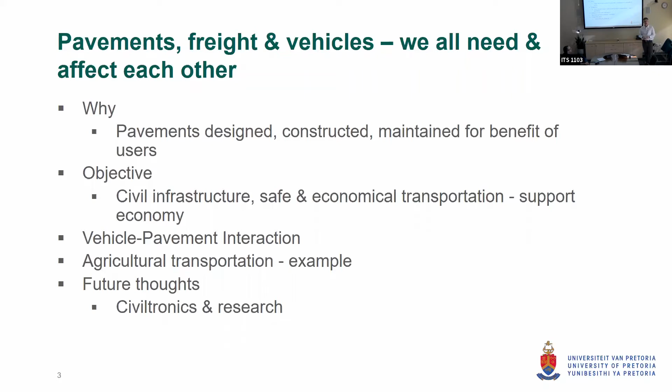And then use some of the agricultural transportation examples of work that we've done in California and South Africa as a way to explain some of these bigger issues and how your little bit of work that's very important can fit into a bigger picture and can affect the general population out there in their day-to-day lives. And then lastly, a few things that sort of tie together some of the instrumentation and some of the more future thinking about what we are doing.

Okay, so just to give you some perspective, I decided to use South Africa for this because obviously I know the picture a bit better, but as a general idea. South Africa is on the southern point of Africa. A good way of naming a country. It's on the southern part. And it's very much similar to you guys. North America, northern part of America. So it makes life much easier in terms of naming it.

We've got a road network of just about 750,000 kilometers of roads. So that makes us the 11th longest road network in the world and the 18th longest paved road network in the world. But what's quite important is that about 80% of that road network is gravel pavements. So although we've got this huge network, if you look at it over there, that's the center of the economic activities of the country. Johannesburg, Pretoria, my university is just over there. The blue roads that you see is our national road network.

Our interstate, if you want to say it like that, connecting the country together up with the northern countries in Africa. But then you've got the red lines there, which is the more provincial type of roads. You've got the smaller ones.

And in the end, it's important to appreciate again that although most of your work that you are doing, and that you will see if you start to talk to people about pavement engineering, about transportation models and so on, most of our work focuses on interstates, highways, major traffic type of roads. Because yes, obviously that's normally the more economically important ones. That's the one that if something goes wrong, you've got a bigger problem.

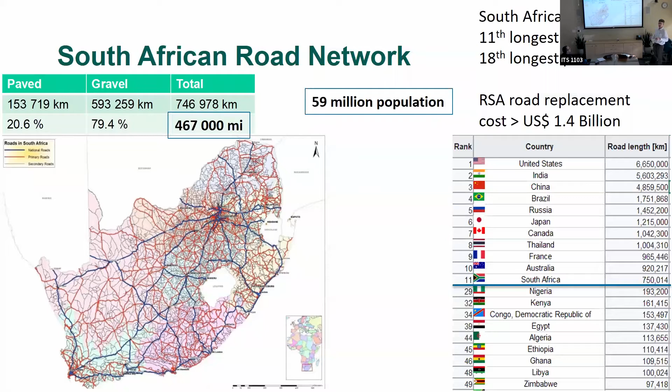If you look at our country over there, we've got some snow now and then over there, the mountains over there, and in the mountains over there. Further on, we don't have snow on the roads. So anyway, it changes depending on the environment, what you need to do on your roads. Keep that in mind.

Okay, so brings us again to the why. Why is all of this important? Why do people need to travel? They need to travel for social reasons. They go and visit people. They need to travel for economical reasons. You need to get to your job. They need to travel to either collect food or to distribute food. And that would be important for the second part of what we are talking about.

And as an example about that, if you're talking about transportation and logistics and movements, it's never a simple solution, because if you look at the pictures, that guy is transporting tomatoes, those guys are transporting tomatoes, that guy is transporting tomatoes. So all three of them transporting a vegetable from one point to another one. But depending on the need and the requirement and the market and everything, there's a total difference in terms of the transportation needs and the road needs and the pavement needs between those three aspects that you look at.

Other reasons why we need to travel: education, safety and security, health, you need to be able to get to clinics, hospitals, and so on. So a lot of reasons why people need to move stuff. And whether the stuff is other people, themselves, goods, whatever the case may be, you want to move that in a safe and economical system.

So you want to make best use of your limited budget, and you want to be able to have a bit of a guarantee that if you travel from here to San Francisco, for whatever reason, you've got a pretty good probability that you will arrive there within a certain time. That's something that you expect.

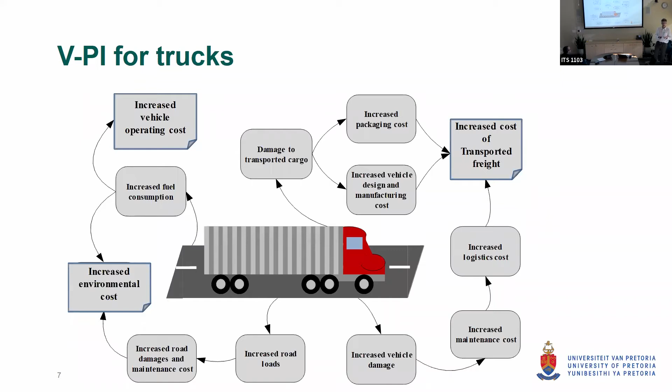Another reason why riding quality is quite important is this example of what do we know if we know the riding quality of the road. A road can deteriorate because of many problems or issues. To make it simple, you can have permanent deformation, which is rutting, or you can have cracking on that road. Whatever goes wrong with the road ultimately is visible through worsening of the riding quality.

So that's why we see measuring the riding quality similar to you going to the doctor because you don't feel well. And from experience, all of you will know if you go to the doctor and you say, listen, I don't feel well, apart from the fact that you are bleeding profusely because you cut off your hand or something obvious like that, the doctor will listen to your story and say, thank you very much, come and sit down. I want to take your blood pressure. I want to measure your temperature. And those two indicators are not really going to tell the doctor what is wrong with you.

But if the blood pressure or your temperature is outside of normal limits, it will start to tell the doctor, well, maybe you are really not feeling well, and maybe they need to look a bit further into this. If you come in and you say, listen, I really don't feel well, and your blood pressure is normal and your fever is good, they will probably ask you, so what exam are you writing tomorrow? Because everything is within spec over here. So it's an indicator of the health of the body. And in the same way, riding quality is an indicator of the health of your road.

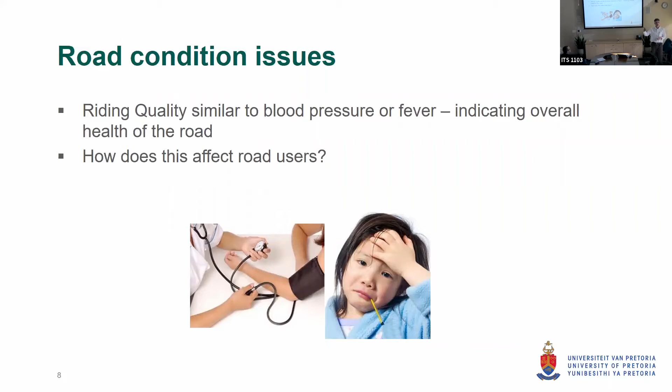Over time, again, many studies have been done on this where you can see that as you use a road more and more, the riding quality typically deteriorates. So it's a standard feature of a road. It's not a road that's badly constructed. It's a standard feature. Over time, it will deteriorate. And you will have to, with use, get to a point where you do some maintenance and some rehabilitation to that road. Okay, so in terms of what happens to all of this cost, I've got these vehicles with freight traveling on the road. I've got my riding quality that changes.

If you look at what we call the logistics costs of transporting stuff, and this is an example of our South African ones, you will see you've got transport, which is this major part here at the bottom that runs at about 50 to 60% of the total cost. Then you've got other stuff also, inventory carrying cost, warehousing cost, and things like that. But you can see that in terms of getting stuff from point A to point B, although there's a lot of other costs, your transportation cost is a major part of that.

So being a 60% part of your logistics costs means that it's important, but it also means that if I can manage this part better, I can maybe cut down on that total cost significantly, whereas if I ignore this major part of my bigger costs, it's very difficult to get away from that and to save in terms of transportation cost and drop the cost of goods that you have to deliver.

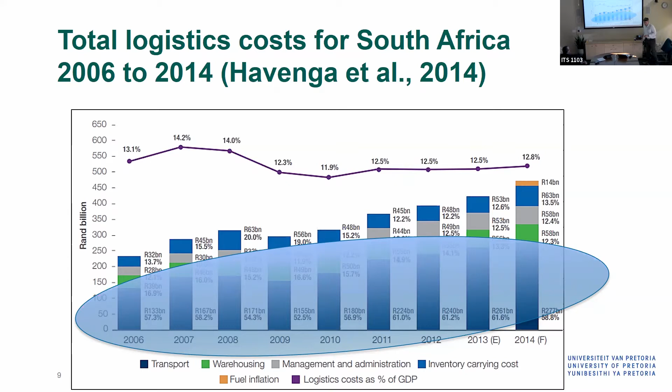So let's now get to something that's a bit more close to an example of why these things are important and how you can see them in your day-to-day life as transportation engineers, pavement engineers, and road users and people using goods that are transported on roads. So in terms of the projects that led to a lot of what we are talking about here, as I said now, riding quality is indicative of road condition, and it affects your operating cost, your transport cost, damage cost, and so on.

So in about 2010, we had a discussion during some of our meetings over here with Prof. Carl Monismith, still at that stage at Berkeley, in terms of, we know this is important, but how do we actually characterize this cost? How do we quantify it? How do we get to people that are in places where they decide on a roads maintenance budget and convince them that a road with a bad riding quality really needs attention?

Because the problem with riding quality on the one hand is that the road is not falling apart. You can still drive on the road. And you don't really see that it's bad. You may need to drive a bit slower, but it's not the end of the world. So it's very difficult to convince the people with money to spend more on a road that's in a sort of not bad condition to improve that, because that will lower my logistics costs, my operating costs, and my environmental costs.

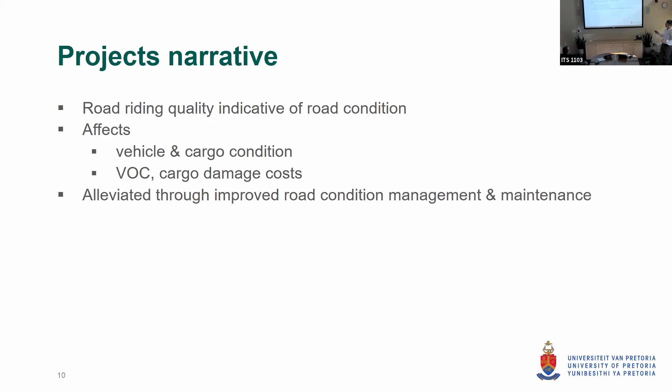So at that stage, we started what I will call the Caltrans projects in 2012, some of the measurements in terms of transporting agricultural goods. And then once we started with that, some of my local guys in South Africa heard about it, and the biggest tomato producer and avocado producer there contacted us and said, listen, can you do something for us also? And it grew, and the latest study is one that started end of last year.

And I will take you through these examples now and show you partly why vehicle pavement interaction is important, but also quite important how technology changes over time and allows you to do more and more things, get a better answer than what you have been able to do previously. That's also, I think, quite important.

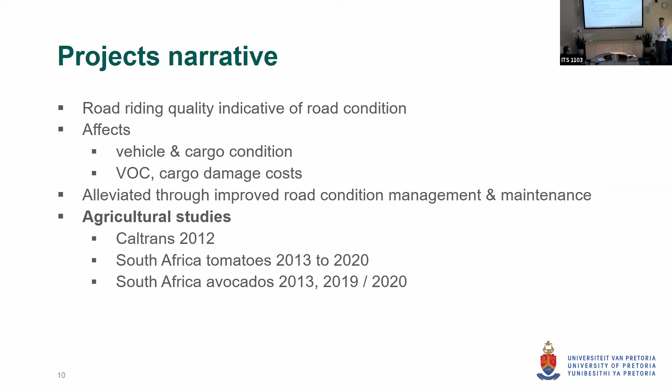You guys are studying now, you learn new techniques, you learn about sensors or stuff, and you think, wow, I get a degree, I know all of this stuff, I now know how to do my job. The bad news for you is in 5 years' time, there will be better technology, better methodologies, and most probably different questions to answer. And you will realize, oops, the stuff that I knew 5 years ago is not enough to answer questions in a good way anymore.

So, let's start. First project that we've done was in 2012. Up until that point, if you wanted to measure accelerations in a vehicle, which, for the context of vehicle pavement interaction, is basically measuring how much the vehicle bumps up and down as you drive on a road, you had to install accelerometers on the vehicle with wires, with a big data acquisition system on a computer, and then you could collect a lot of data.

Now, if you look at the truck that the farmer uses to get the tomatoes from the farm to the packers and so on, you can think for yourself, if you have to get permission to install a lot of accelerometers at certain places with wires and everything, it's very difficult.

So in our evaluations at that stage, we got hold of a little sensor, and I'll show you, it's a bit bigger later on, but you can see that there in the circles, it's about that big, it's a standalone accelerometer, and it provided us with the opportunity of instrumenting a vehicle at different points, also inside the tomatoes that's being transported, drive over a number of roads, and collect the riding quality as we drove. And also collect what happens to the cargo, the tomatoes in this case, as you drive on those different roads.

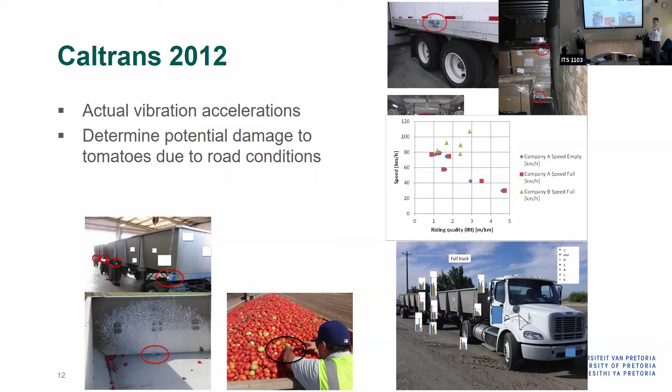So we could measure the actual riding quality of the road using different technology. We can measure how much the vehicle is reacting to these different roughnesses of road, and there you can see different roads. And we could measure what will happen, we think, with the tomatoes sitting over here in this vehicle as it bumps up and down. So taking all of that data, and this is one specific road section, we had the measurements and we said, okay, but now we can start to see how much of an effect it really has.

So in terms of the road roughness measurements, I'll just get to the colors for now. You can see that there's a green section, and then there's a red section that's worse, and the yellow section that's sort of in between in terms of riding quality. So we've got a good section, a medium section, and a bad section. Same section of road. So you drive from here to there, and due to various reasons, you've got these different qualities. Now, if you convert that through various calibrated models, you can also transpose that to the tire wear on the different sections of road.

And what's interesting over here, and I think that's also important for your understanding of different types of models, you will see that we've got three different levels of roughness on the road. But in terms of the tire wear, there's only a tire wear over there, and those two sections, although it's a medium and a bad section in roughness, they gave a similar output in terms of tire wear. So the fact that your riding quality has got more subsections does not always mean that whatever you calculate based on this will also relate in the same way. So for the tire wear model, it showed us that was not too bad, that was a bit worse.

In terms of repair and maintenance on the vehicles itself, we again got different outputs in terms of tire loads and emissions and fuel consumption. We could also show the differences. So the benefit at that first point was that you could say, okay, if you transport tomatoes, this type of vehicle, on these roads at these speeds, you can see that in terms of fuel consumption and therefore operating costs, you will get different responses on different sections of this road.

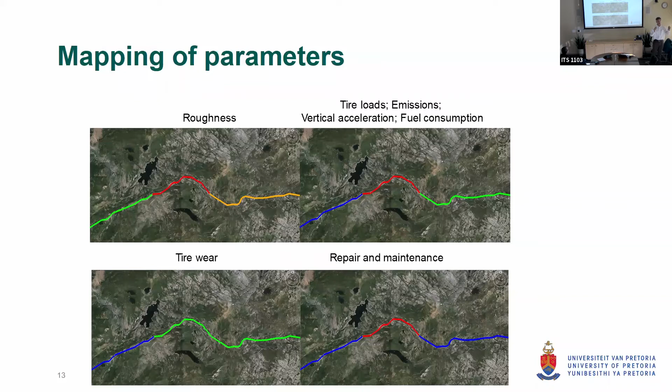Which obviously will tell you that if the cost on that middle part, because that was the worst part with the worst riding quality, becomes too high because of bad riding quality, if you fix that road, if you improve the riding quality of that section, you should drop the cost on that section of road, you should drop the tire wear, you should drop the repair and maintenance cost. So ultimately you drop the logistics cost of transporting your tomatoes. So that was part of what we got out of the first part of the test.

Now in terms of the sensors that we used for that, what you see on top is the accelerometer. It's about that big. It was really a major step forward at that stage because you could just bring them out, fix them to the vehicle, fix them into the tomatoes wherever you want them, do all your data collection, get back to your lab, download the data, and you've got a full picture of what happens over there. So that was quite a step forward.

At that same stage, sort of halfway through this project, we got hold of another type of sensor. That's those flexible plastic contact stress measurement mats. Now, the benefit of those things, you will sort of see the little black spots on it. On that surface area, and you get different sizes, you measure the contact stress between whatever you press on top of that mat. So if I've got a tomato there and a tomato over there, I can measure the contact stress between those two tomatoes.

As I said, this became available halfway through the project. So at that stage, we had data on how much our tomatoes bump up and down in the field. We could not install this in the truck at that stage. So we got to the laboratory.

We used the accelerations that we measured in the field. We made up these boxes of tomatoes with the sensors on the inside, and we applied the same accelerations in the laboratory as what happened in the field. And we said, okay, now we can measure what are the contact stresses between the tomatoes.

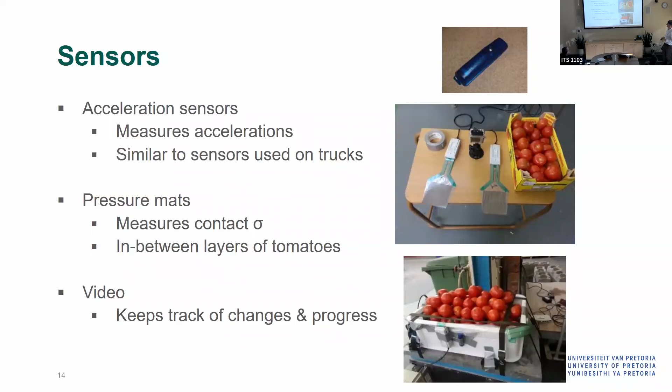Now you stand back again a bit and say, well, why do we do this? We are pavement engineers. We are interested in building a better road. We are doing this because this tells us what's the effect of our road on the tomatoes that are being transported. So we put all of that together and we got contact stresses.

Now, the next problem is, if I tell you that the contact stress on the flat side of a tomato, if it's green, is 28 kilopascals, then you say, wow, okay, that's good news. And so what? I mean, if I tell you it's 400 kilopascals or 2 kilopascals, you start to get the values, but you need a relationship of, so what? How much damage is this?

So that's where we started to engage with the agricultural people and said, okay guys, how do we now determine where's the cutoff point? What is bad and what's not bad? Unfortunately, they've got various systems looking at this. And the basic crude one that we used, which was not that bad in the end, was to say, okay, let's apply these stresses to a set of tomatoes.

And you'll see that there's green and ripe, and you'll see later on pink and red. We learned a lot about tomatoes in the whole process. And we did damage a lot of tomatoes in the process. We also ate a lot of tomatoes.

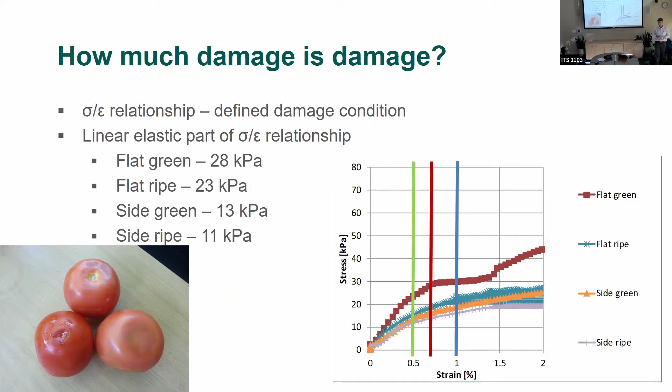But basically we said, okay, let's apply 28 kilopascals to a tomato and put it on the shelf and see what happens to this tomato. And we also do it with 13 kilopascals and so on. And essentially we want to see, when does it start to look bad? That was for us not too bad from an engineering viewpoint. And you'll see in a few slides why that was actually not a bad idea to do that.

So what we got from this up until this point was to say, we can use the relationships that we've got now, which tell us on that type of road, this is how much tomatoes you're going to bump up and down. And these are the stresses that they are going to feel. That helped us from a road user viewpoint to say, if I've got alternative routes available to travel from point A to point B, and I've got the riding quality of road A and the riding quality of road B, this knowledge can tell me which of those two roads will cause the least damage to the tomatoes that I am transporting. Because I want to get it to the end point without damage, obviously.

And if the distances are not that much different that the travel cost becomes exorbitant, then I can make that selection and say, I don't want just the shortest or the fastest route. I want the route that will cause the least damage to my products. That's from a road user viewpoint.

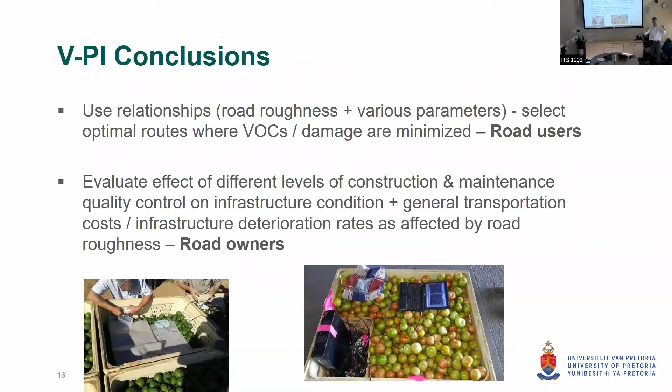But from a road owner viewpoint, the Department of Transport, it also started to allow them to say, we can now start to quantify, we are not really there as yet, why do we need to improve the condition of this road? Because as I said earlier, you can have a road with, from an engineering viewpoint, a pretty bad riding quality, but it's still rideable. So it's not that the road falls apart. But this started to allow the Department of Transport to say, guys, there's actually enough wrong with this road because the amount of damage that it caused to the tomatoes is so much that there's a real cost over here. So that was the initial output that we got from that part of the project.

Then we got back to South Africa, and as I said, we spoke to various people, and the guys at ZZ2, the big tomato guys, said, listen guys, we want to do it for South African conditions also. The benefit at that stage, with development of technology, is that these contact stress mats, we got to such a point that you could actually put them together with an inverter and a computer and stuff inside a bin of tomatoes on top of the truck. So we started to do that. We also had it inside the boxes, because some of the tomatoes are transported in bulk. Some of it is transported in boxes.

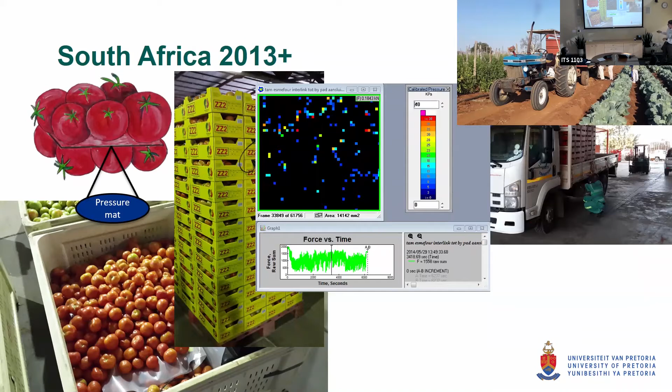So we installed them, measured these stresses. You get this type of data out of them over time. And we've done it with various types of vehicles. So we had tractors in the field. We had bigger trucks. We had the big ones that we use on the highway. And on a range of routes that included roads in the field, smaller provincial roads, as well as the highway, we collected a host of data in this way.

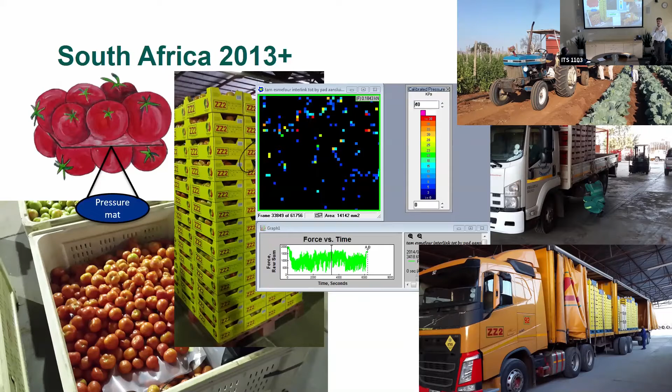Still measuring the riding quality, actual riding quality of the road, still measuring the accelerations on the vehicle, but now, while we drive, measuring the contact stresses between the tomatoes. And the reason why this was quite important was this then allowed us, one of my students, Linky Pretorius, did a master's on this, to develop a relationship between the riding quality of the road, how rough the road is, and the shelf life of the tomatoes.

Because when we spoke to the tomato farmers, they said, listen, the best way to identify the condition of a tomato is to understand that a good tomato has got a 10-day shelf life. And if we can get to a 10-day shelf life, life is good. But tomatoes that are not in a good condition may go off after 6 days or 5 days or 3 days. And that is what affects our income.

Because if the consumer comes and buys our tomatoes today, and after 3 days they are not good anymore, they don't come and buy our tomatoes anymore. Or they pay less next time. So if we can have a 10-day shelf life, people will come back, they will buy our tomatoes, they will use them. So what she developed was this set of relationships. It's there for red, pink, and green tomatoes.

Now, red, green, and pink is not just a color. They've got nice detailed color charts that actually, I think they've got 7 to 9 actual colors that you define the ripeness of a tomato with. So that will be a ripe tomato, that will be an in-between one, and this will be, as it says, a green tomato that's not ripe as yet.

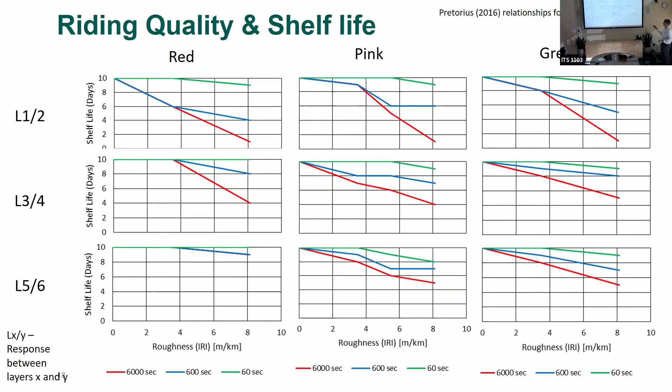And once we started to discuss this model with the local roads agency and the provincial government, it suddenly became very clear to them that it's actually in their benefit to improve the condition of the road. It's not only the farmers that are going to get the benefit out of that, but the community will benefit because of the higher income, but the state finances will also benefit, which allows them to do more improvements onto the roads. So this was quite a major step forward.

Then the next step was we got back to the States. And we said that as an intermediate step, it's good to have measurements on short sections, but what happens now if you transport stuff over a long distance? Because now a lot of things are out of your control. So in this case we did not work with tomatoes, we worked with berries. We installed sensors on a truck.

There you can see a number of them measuring the acceleration on the body of the vehicle, measuring the acceleration on the axle where you've got no suspension as yet, and measuring the acceleration on the boxes of berries. And then we took that truck and it started in Watsonville and it traveled all over the country to Dover in Florida, transporting these berries.

And there's a lot of additional data, but just as one example, each of the lines is pretty much where it went from one state to another state. And what you see over here in these lines, the yellow line is the body of the vehicle, and it's a ratio between the acceleration of the body of the vehicle and the back axle as an indication of how much acceleration, how much bumpiness we get in the system.

So you can see the body is not too bad, but there on the boxes of berries, middle of the berries and top of the berries, you start to get, especially in some areas, quite a lot of acceleration, so quite a lot of shaking of those berries as you transport them. The reason why this is important, this led to the current study that we are busy with in South Africa that I'll show you in a few slides, of not only focusing on one small part of the solution.

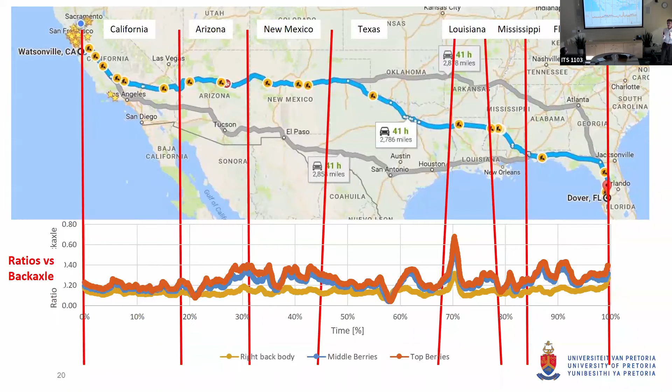So if you look over here, if you improve that section of the road so that you've got no accelerations, that it's absolutely smooth, but this part of the road is still bad and you don't know about it, then your berries will still get to this point in a bad condition. So you need to sort out your part of responsibility, but then also stand back and say, but how does this fit into the bigger picture?

So in terms of taking this model further, when we had a discussion with the local guys in South Africa, a lot of the avocado pears in South Africa are exported to Europe. And they started to say, well, okay, we've got an understanding of what you do on our roads now, and we've got this discussion about tomato transport and avocado transport, but we transport stuff from the farm to Europe, which means we have to harvest the avocados in this case, and we have to clean them, we have to pack them.

There's a local transportation network, then there's a transcontinental sea part, and then a portion up there in Europe where we don't have any control. So there's parts there where we can improve the condition of the road, but there's parts where we don't have a clue of what's happening to these avocados that we are exporting. Can we measure the effect of each of these parts?

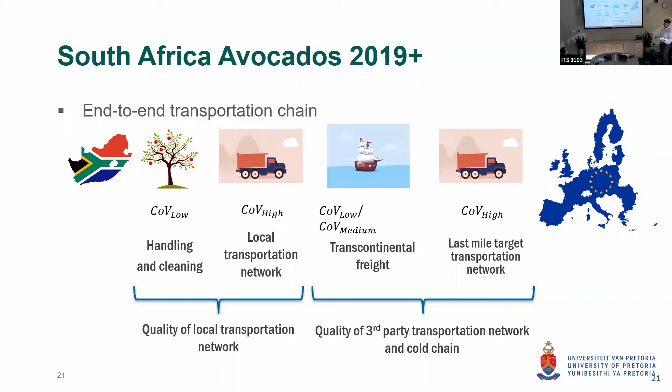So that's a current study where we then started and said, okay, technology changes. We need something better because we cannot put in these mats for that whole trip. So I've got another student, and for his master's degree he developed, well, I'll show you a few slides towards the end, an intelligent railway ballast, which is basically railway ballast, the big aggregate that you use in rail. That's wireless, and it measures what happens to that ballast as the train goes over. So we used exactly the same technology, which is the inside of that.

We 3D printed avocados, and they are wirelessly charged as they sit over there. So we've got 3D printed avocados. That's a harder type of plastic because the condition in which avocados are normally transported is very hard. But we've also got a flexible one, which is the tomato one, because the tomato is obviously softer than avocado.

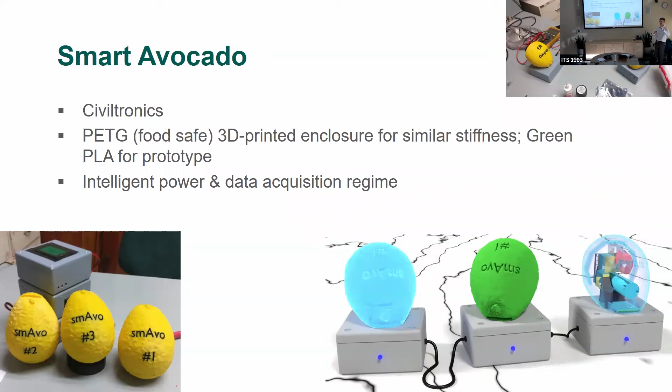But the inside of all of that is a little computer with GPS and accelerometers and gyroscopes and temperature and light levels, which means that technology-wise in 2012, this was not possible at all. Now we sit with something that's that big, and I can collect all of this data for the whole trip. So once we had that, we said, okay, you have to start in the field.

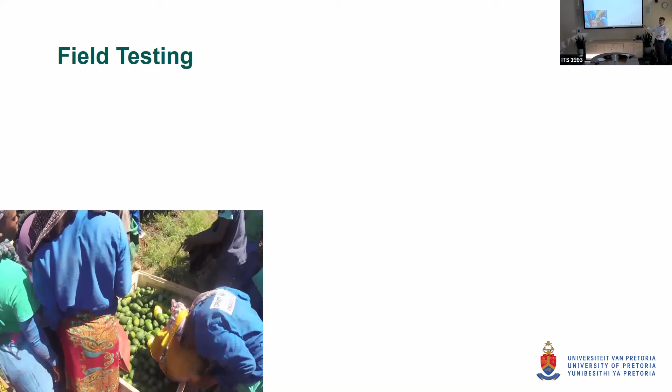And you will see this guy that harvested it. This is how they harvest the avocados. He's getting to the containers over there. That's the smart avocado. This is important because it doesn't help me to sort out the road. And the way that they harvest it and pack it and throw it out and stuff cause a lot of problems. So we started to measure at the tree.

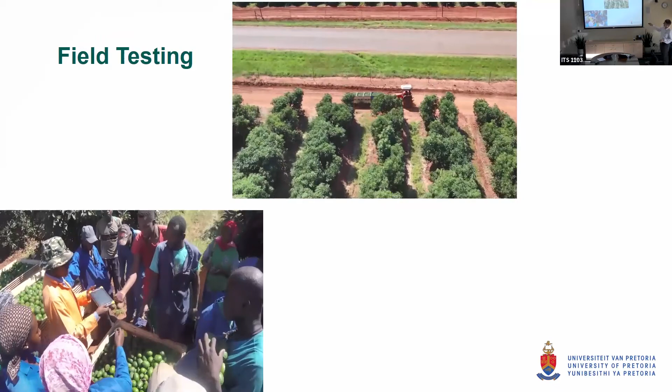Then that's the portion where they drive in the field itself. That vehicle that they use doesn't have any suspension. And that's not really a road. It's a gravel farm section of road that they drive on. So you can see a lot of bumpiness in that portion. And then after all of that, they get to the pack house and they dump it out. And the smAvo is going on that whole cycle of moving through the pack house.

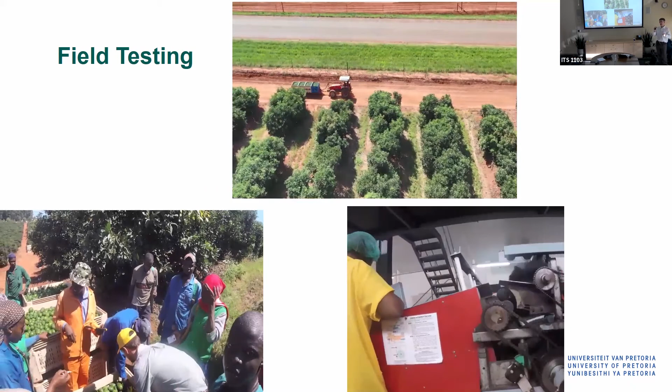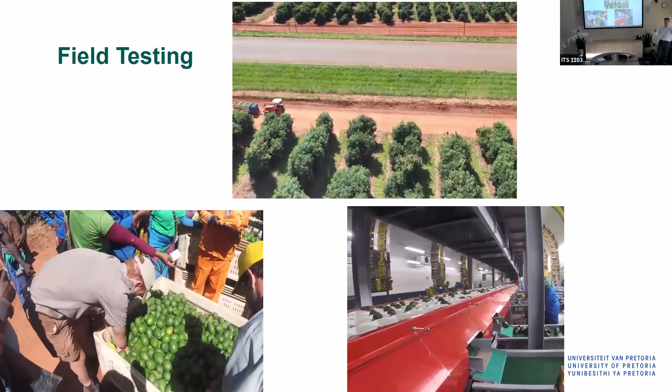So fortunately, the client that we've got in this case said, listen guys, we know you are civil engineers and pavement engineers and you are interested in the pavement part of this, but we realize that that portion and that portion is as important in this chain of events. Because if we perfect the road over there, but the avocados bump up and down in this part of the system, they are still going to get damaged.

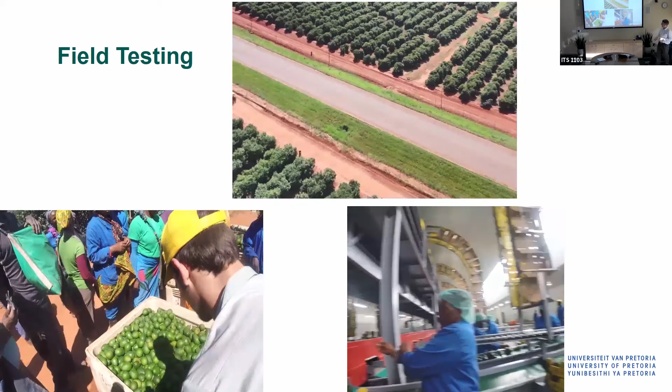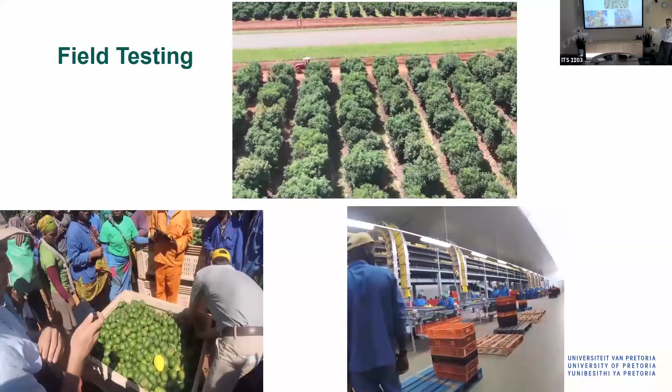So although we are busy with the big project now, we are, as part of that, doing 52 pack houses, where we just measure the effect on these avocados from the moment that they are dropped in the pack house until they are in the box. Because they want to also look at what's the worst conditions that they measure over there.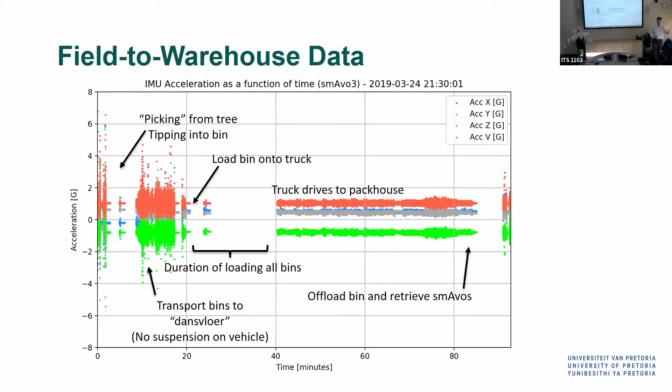So that's just, if you look at the acceleration, the harvesting, the bad part in the field, the paved road, gravel road, and the pack house. But then it's not only acceleration, because what happens to these avocados as you transport them, they also roll around. That's where you have to speak to your client, because your client, the avo farmer, tells you, as avocados roll around, they start to damage the skin. And this is not good for them.

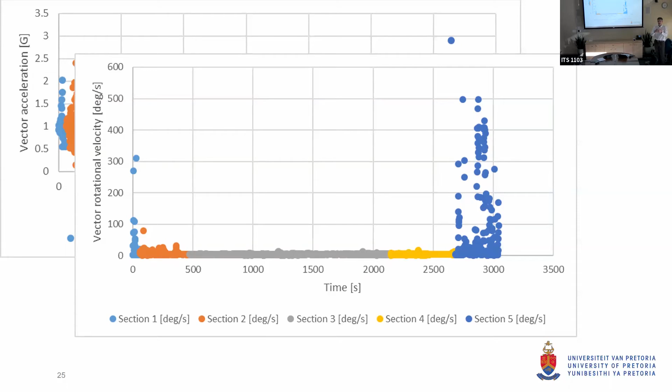So the first one shows us the accelerations. The second one shows us how much roll happens. And again, you see on the road itself very little. In the pack house, a major lot, because that's happening the whole time. So you have to look at what happens to the skin over there.

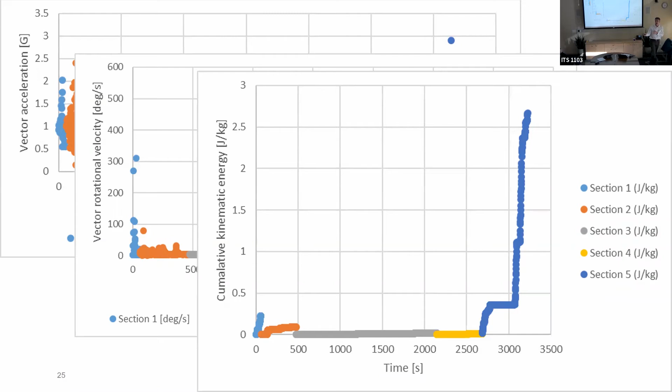And then, as engineers, we want some way of expressing this. So we calculate this as a cumulative kinematic energy. How much energy is going into that avocado as you transport it? Because obviously, the higher the applied energy, the higher the potential damage to this specific avocado. And it all started because we are interested in the riding quality and how the riding quality affects the users.

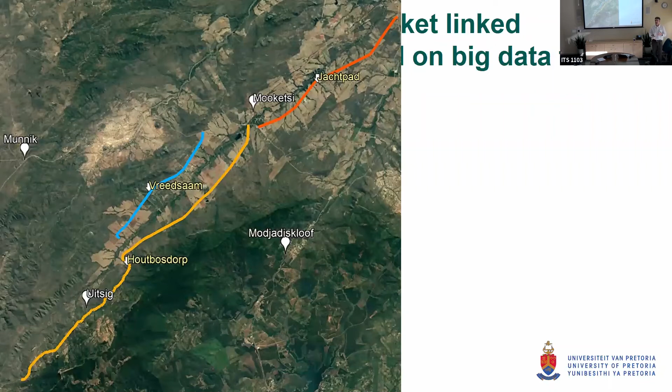So I've got another student, and she said, okay, this is fine. You guys are interested in maintenance of roads, gravel roads, because that's actually how we assist this avocado and tomato farmer. But we all know we want to improve the condition of the roads, but by how much must we improve the condition? Because the whole road network over here is unpaved roads. They drive up and down in the mountain to go and harvest the avocados, down there to the pack house. But how often should they maintain this gravel road, and by how much?

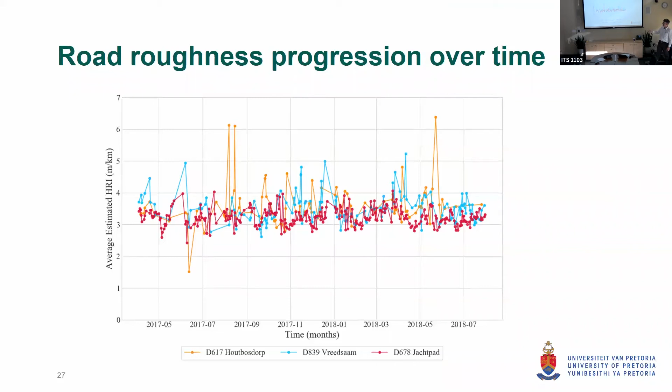So she did another project where we took images, we've got cameras on their vehicles, images of the road condition. We collected data over a year or two on the average riding quality on the road, on when it rained, on what happened after we maintained and graded the roads and so on. And then she combined all of them, and unfortunately I don't have the final graphical part of what she's done. But then she combined the 3 lines over there, which are the shelf life equations that you saw earlier, together with the annual hourly cost for grading the road.

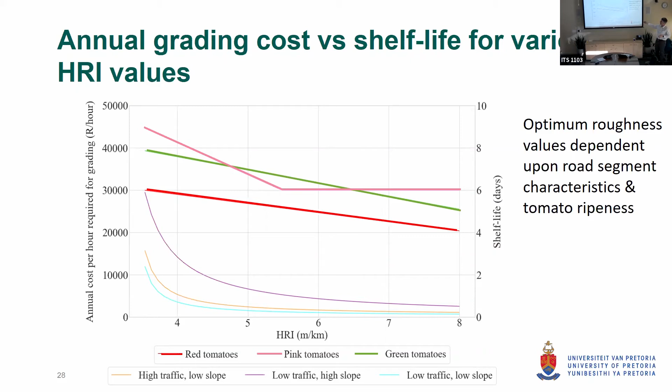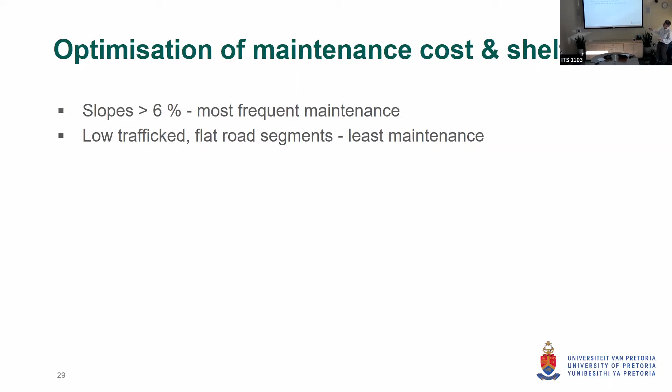Because obviously I can come and grade the road every day and it will be in a perfect condition. It's going to cost me a lot of money. Or I grade it once a year. I save a lot of money, but the road is in a very bad condition and my shelf life gets affected. So what she's done by doing all of that, started to realize in terms of maintenance of the roads, if you've got sections of the road where the slopes are more than 6% and it's a mountainous area where the avocados are growing, obviously you need more maintenance. The sections with less traffic and flatter, less maintenance. And those are sort of the obvious things.

But what she's done in the optimization then is to get to this point. This is again where it's important to understand people are using your road, you need to understand their needs before you tell them how often you need to maintain the road. If you've got high market demand for tomatoes, then a long shelf life is not really needed, because a lot of people come and buy your tomatoes, they consume the tomatoes within 3 or 4 days, and they come and buy new tomatoes. So they don't care whether the shelf life is 10 days or 9 days or 8 days. As long as it's more than 3 days, they are happy because they consume good tomatoes.

So if you've got high market demand and low shelf life, then it's actually okay to harvest tomatoes that are more ripe and to maintain the road at a value of 4.6 meters per kilometer riding quality, which is a worse condition than 4. So you don't have to maintain that road at a higher cost to the same level of quality, because the user will be quite happy with what they get. And this saves the farmer money, because they don't have to grade the road every week, they can grade it every 2 weeks.

On the other hand, if you've got low market demand, people buy the tomatoes and they leave it on the shelf for up to 10 days, you better make sure that it's still in good condition after 10 days. So in a low market demand situation, you have to make sure that your roads are in a good condition, because the effect of the roads on the tomato condition is going to show earlier to the consumer, and that will drop your income.

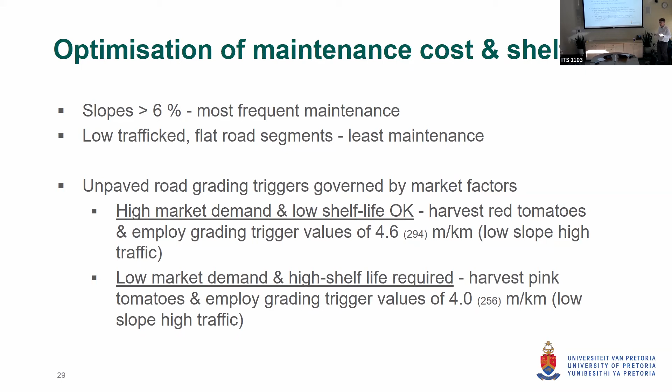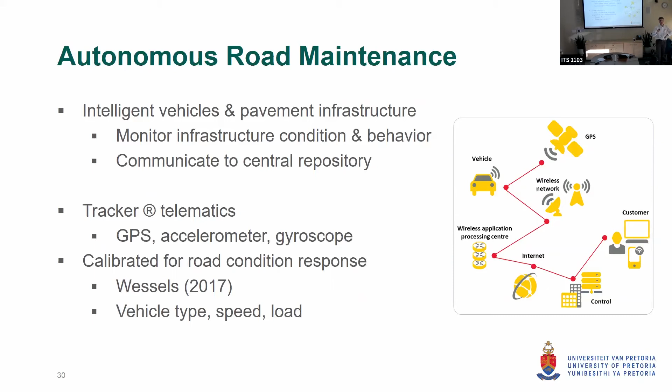Looking at all of that, putting it together from a road maintenance viewpoint, we also then developed a model for them where they are in, let's call it a semi-autonomous road maintenance procedure, because the trucks that they use to transport these tomatoes have got sensors on that have got various telematics in, and they are calibrated to continuously provide us with the riding quality of the road. So as the truck drives and it's finished, you get a little indication that that's the condition of that road. Those are the bad spots on the road.

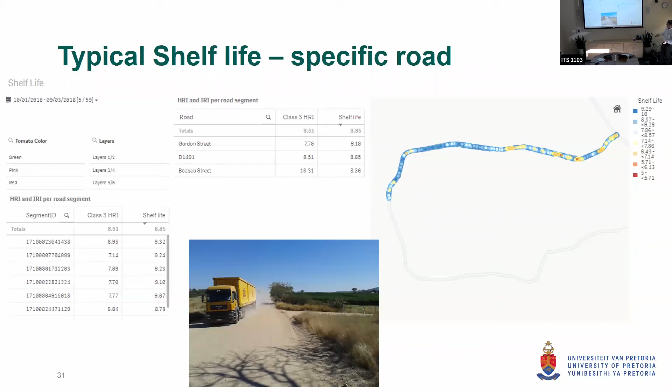So the vehicles actually tell us where the bad spots on the road are. We don't have to have a dedicated measurement device that you send out once a month or once a year. Because we immediately know the condition of the road, we get a picture like that. That's that section of road that tells us that's the required riding quality. All of the spots where the riding quality has got a higher number are bad.

Go and fix those specific spots with the grader and leave the rest alone. By doing this, these guys save between 40 and 60% on their blading or maintenance costs, because suddenly they did not have to go and blade the whole road. They focused on those sections.

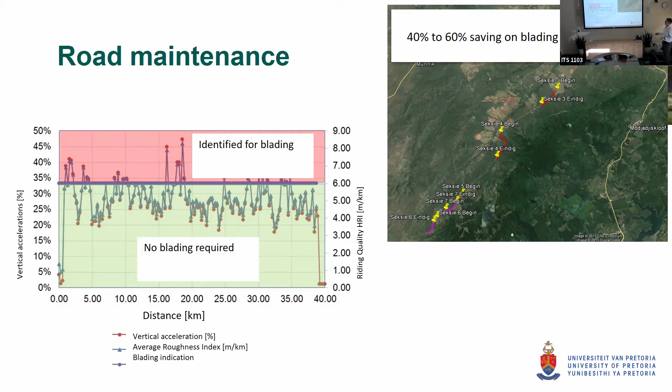In terms of the semi-autonomous road maintenance, what happens now is the truck drives on the road. The truck reports automatically through the telematics that this section of road is bad. That message gets to the grader operator, and we are not totally at the autonomous grader as yet, but he gets a message and basically tells the grader operator, go out to that section of road and go and grade it. That's the job. It's GPS linked.

It tells the system, I've graded 2.5 kilometers of this road on that section, so they can log the fact that the work has been done. And the next truck that drives on that section of road reports back and says, listen, the riding quality is now at this level again, so it's fine. So we drop the effect of the riding quality and we improve the road condition.

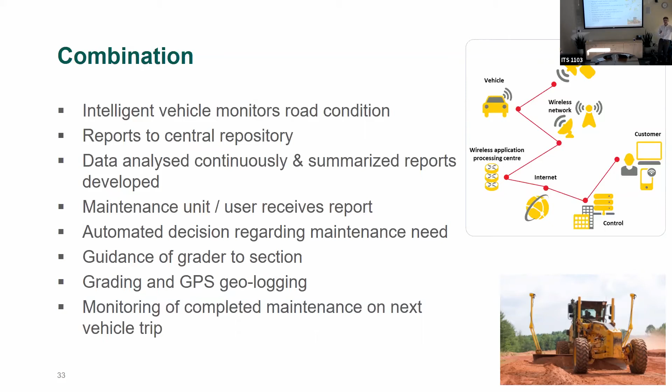So all of this is important to understand, that you need to understand who your ultimate client is. Whether it's a tomato farmer, or somebody going to school, or somebody traveling somewhere, or transporting whatever, because all of that knowledge affects the way that you do your job in a better way.

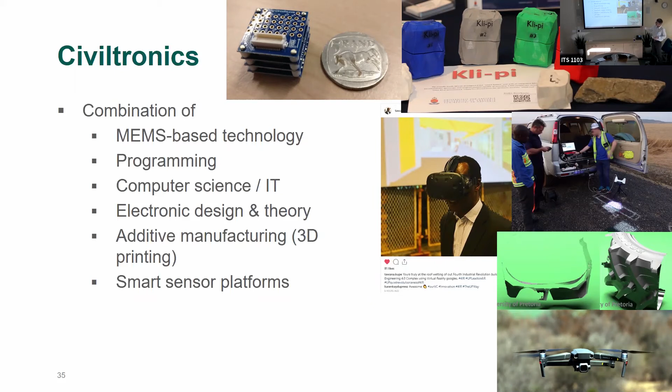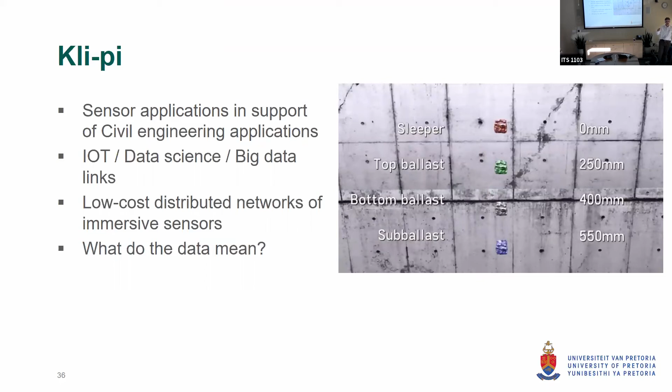As I said, the civiltronics that allowed us to do it started off with those little computers. Those are the smart ballasts that we started to develop. It links a lot of technologies that start to become easier and easier to do. And by doing that, this is an example of the ballast, for instance. Again, something that without this type of technology would have been very difficult to measure. As the train goes over this position at different levels, we start to measure the actual movement of those ballasts.

And now you can say, well, but that's sort of almost robotics and things like that. You are a civil engineer, why are you interested in this? Because the moment I know how much movement there is in those ballasts, I can talk to my engineering geology colleagues and say, if I've got this type of aggregate and there's this much movement between them, how quickly is this type of rock going to deteriorate and affect the quality of my rail network.

So it's knowledge that if I don't have that, the engineering geologist will tell me, okay, that rock is better than that one, but I can't tell you by how much. So you start to quantify your damage.

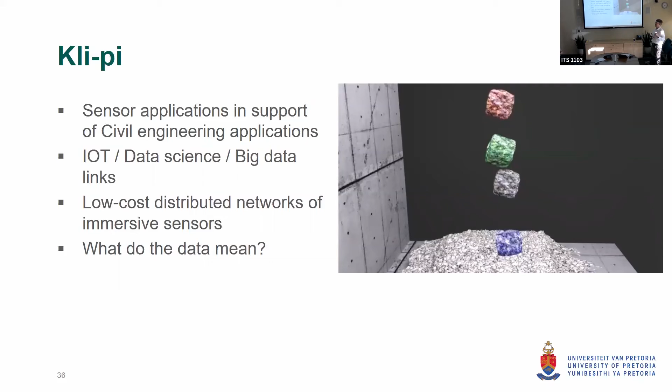The same way, we developed what we call SNOET. Now, SNOET, for everybody that's not Afrikaans, that's my home language, is actually the word that you use for the nose of a pig. Snout would be the English. So, SNOET is a little device that we then put together. It's wonderful to be at the university and have a very good student.

So the student that's done the Kli-pi, which is the smart ballast, we had a discussion. I said, listen, I want to measure this. And he said, yeah, I think it's possible. And I said, okay, let's make it easy. What can you measure? And he said, no, you have to tell me what you want to measure. I said, no. Tell me what you can measure, everything.

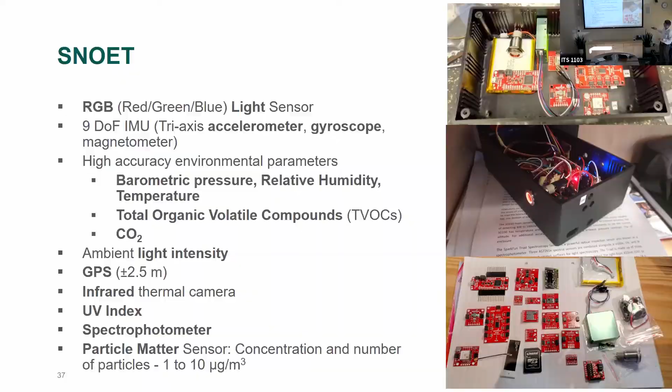And he literally went through the catalog and said, I can measure light and acceleration and gyroscope, pressure, any volatile compounds, CO2, light, infrared, UV spectrometer, particulate matter. And we said, okay, let's put everything that we can measure into this sensor. This is our base sensor. Because on that whole farm area, we've got a lot of agricultural activities. We've got other clients that are interested in what the environmental conditions are.

Again, looking at the way the technology changes. 2 years ago, you couldn't do that. This is one of those projects where halfway through building this, we realized there are new sensors that came out, so we can start to incorporate them. And currently, we are working on a system where we will have that grid over there. With the growth of technology, we can also attach SNOET to our drone and say, but you don't have one level of environmental condition.

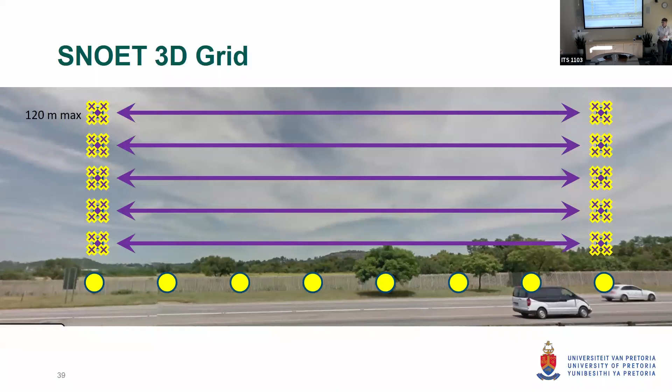As the traffic drives over there, there's probably some changes in the air quality as you go up and down and the way that the wind blows. This is some of the initial data that we have, as just a sort of a quick 10-hour shot.

The yellow is change in humidity. The gray one is as the temperature changes, but the CO2 is the blue one. And the total volatile organic compounds is the orange one. This is where congestion started to happen.

So again, there's technology that develops that starts to provide you with inputs into your models that you can really measure data. You don't have to just use a model that tells you, based on some calibrated model, this is what they expect for this amount of traffic, the CO2 levels to be. You can go and measure it. It's a little box that big and you collect the data.

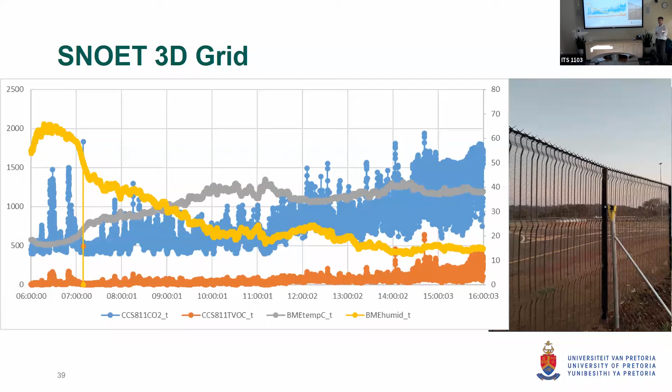So it's important to keep up to speed in terms of technological developments, because what you guys know today, in a year's time, there will be better stuff, improving your modeling, your characterization, your quantification of data. And the better your data becomes, the better the answers can be that you are looking at.

So to finish off, because this is, according to my colleagues, this is like my grandson. And you will know, if you're a grandparent, you've got a little book of photos you show to everybody. I've got them on my phone. That's the way that they work.

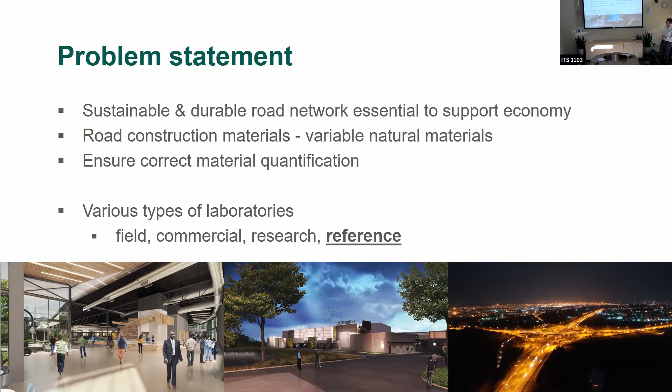But this is actually, we started 6 years ago, and our National Roads Agency said, we've got a need for a reference laboratory. We need a place where we can bring materials from all of our roads in South Africa, where we do third-party independent reference testing of the properties of that material. But while we are doing it, we've got this open area on the campus. Can you also add a training laboratory? And while you do it, can we expand your concrete laboratory? So all of that was put together. And we've got a training laboratory.

And the reason why I'm telling you this is not only to brag about the very nice, beautiful new laboratory, but you have to understand where your data originates from. You guys are clever master's and PhD students. You do lots of calculations with lots of data, long equations. But where does your data come from? If you are working in pavements like I do, there's a technician that does most of your testing. And that technician is the source of your data.

I'm not talking while you're studying, sorry, then you do your own testing. But the moment you start to work, if you go to Caltrans, they've got a laboratory where technicians do the testing. If that technician doesn't do their job well, you, as the clever analyst, get data that are wrong. And you make major decisions based on the wrong laboratory data.

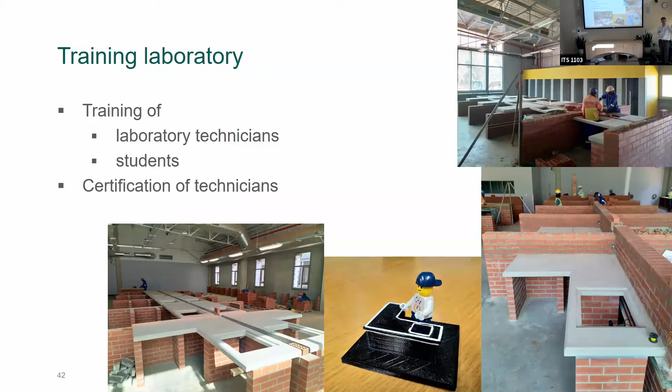So that's the main reason for this training laboratory, to make sure that we train our laboratory technicians to the same level and quality as we train our engineers, that they understand you have to provide the engineer with a good data set. But as part of this, again, linking technology to it, we realized that in terms of training manpower in South Africa, we've got a lot of people that would like to become a laboratory technician, but they are far away from a laboratory. So it's expensive and difficult to get to a laboratory to get trained.

So our colleagues in the IT department developed it with a standalone headset. Again, technology changes. 2 years ago, you could not do it like this. You had to have a big computer to set up the whole system. Now you've got the headset and the two handles, nothing else required. This is a sieve analysis test on the virtual reality system. So although it's like a video over here, you can see the guy doing the test over there.

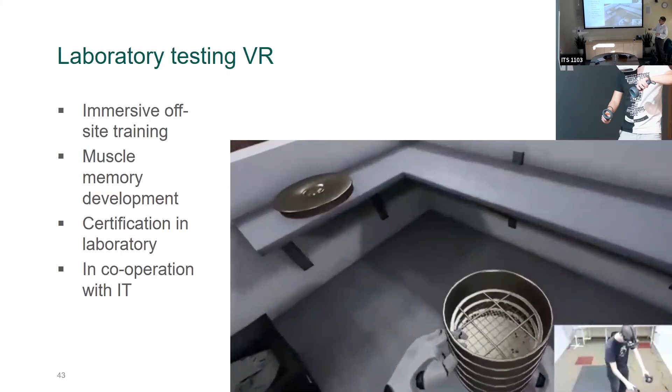You can send this little box, which costs less than $1,000, let's say $800. You can send that box to a guy in some remote area where he's got no access to a laboratory, and say, put it on your head and start to follow the instructions. And do this test until you've got the muscle memory to understand what you're doing. And once you've got that, you can come to my laboratory and we do the final training of how to do it. And that person would have seen the laboratory, would understand the test.

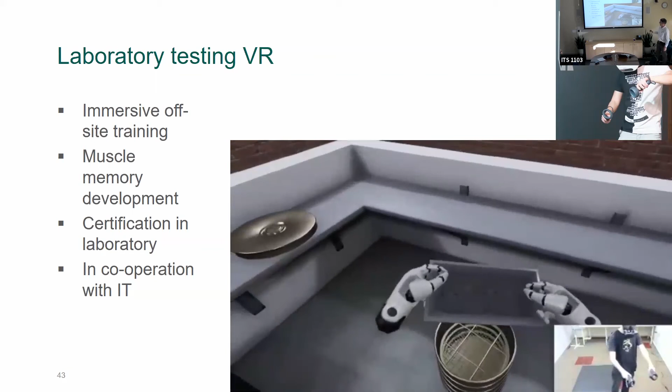And the VR is such that we are engineers, and engineers never grow up. So what we did when we started to get this is the nice version of the video.

I can tell you, if you take that bucket and you sort of lose it, it falls. If you take the bucket full of soil, you saw the soil over there, and you turn it around, the soil falls out. So it's reality. It's not just sort of there's a video and whatever you do doesn't matter. You have to be careful. Otherwise, stuff falls off the table, the soil falls out, it doesn't work anymore. So it's a major part of the training.

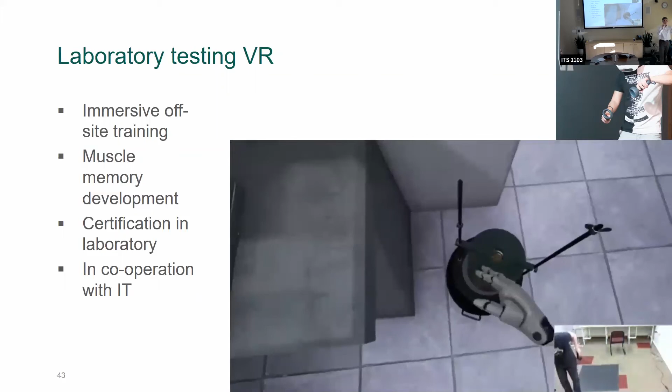It's good fun on the one hand because it's VR and all of those things. But for a guy somewhere in the rural area, this is his career. He or she can learn from this how to do something, come to the laboratory, be trained, and it becomes part of their socio-economic development. So it's a nice, cool part of our laboratory.

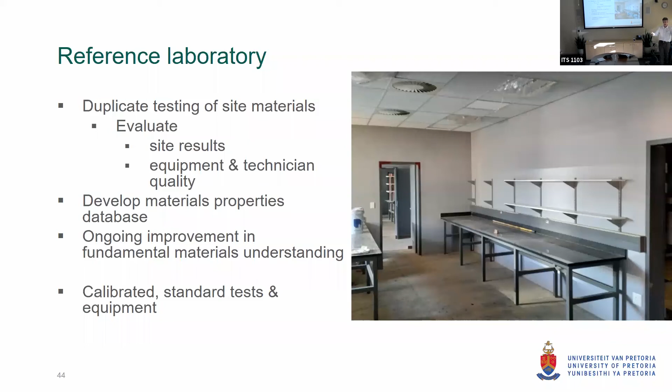We're also busy with the reference laboratory. For the reference laboratory, what's important is to do a comparison between what the laboratory test, the field test on a contract is doing, and our third-party version of the testing to make sure that the data are correct. Now you can do it between those two laboratories and get some results, but the more important part is that it's also supporting the proficiency testing scheme.

Now, a proficiency testing scheme basically says the following. Within South Africa, that's where we are located, this reference laboratory will prepare standard samples of materials, do the tests ourselves, and send those samples out to various laboratories in the country. So you also do the test, and then we compare the results and make sure that the various laboratories actually get similar results for certain tests.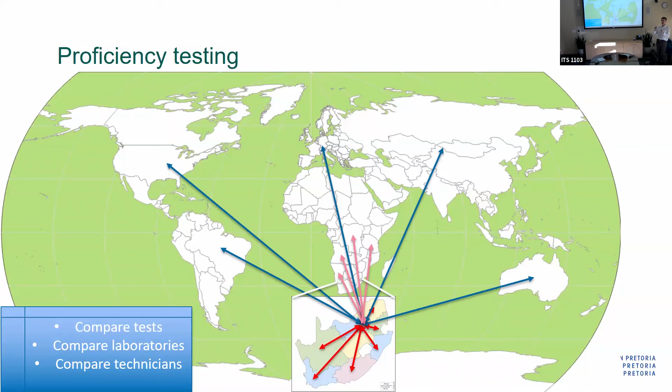But apart from within the country, it also allows us in the Southern Africa area, where there are a lot fewer reference laboratories available, to do that comparative testing, and also with the various international proficiency schemes to make sure that the testing that we do is up to standard wherever we want to compare that. So the laboratory itself has a major role to play in that regard.

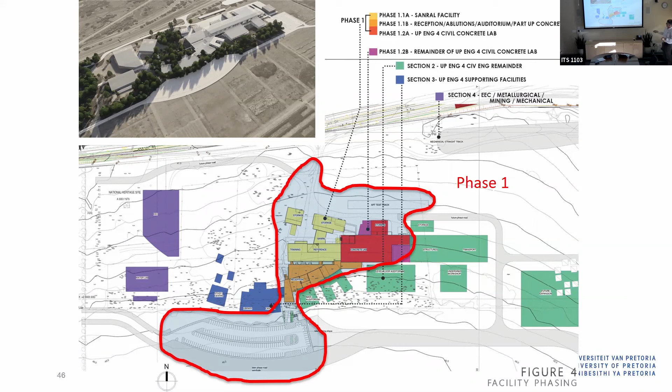And then lastly, in terms of the layout and what we've got, that's the sort of phase one development that we are busy with. So we've got the training and the reference lab where we obtain material properties. So we test one asphalt, one bitumen, one granular material on its own, and we obtain the properties. But we know that the road pavement is not one material on its own.

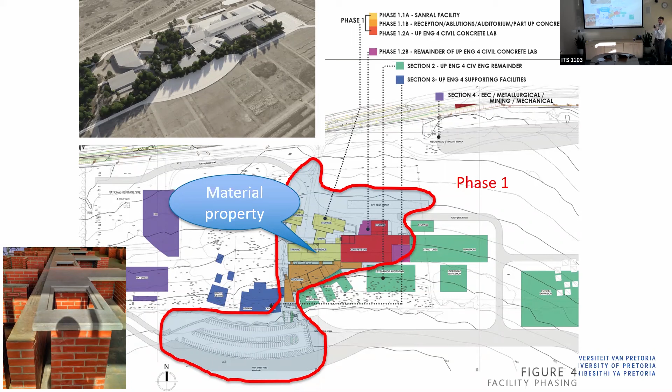So apart from that, we've got an accelerated pavement testing site also on the whole area where, similar to what you've got outside here at the PRC, you can test a combination of materials. You've got a surfacing and a base and a subbase and a subgrade. So if you put all of those materials together, you can see what's the expected performance of this pavement structure.

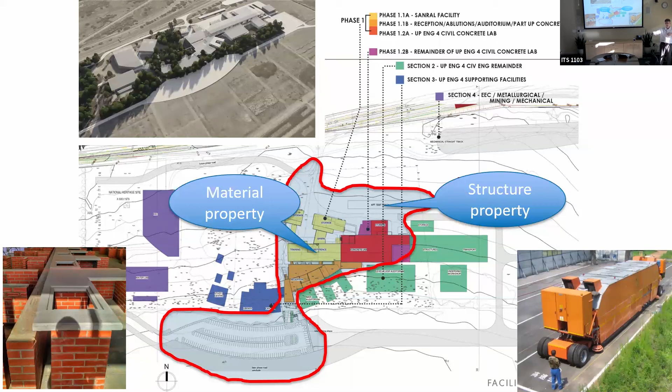And where we are really fortunate is that right next to the laboratory, that's a fence of the laboratory, we've got a highway. And because the National Roads Agency is the sponsor of the project, we asked, but it's like when you ask for a Christmas present, you think, I'm going to stretch this, I'm never going to get a bicycle. You ask for the bicycle and your parents come and give you a motorbike. This is pretty much what happened.

We told the National Roads Agency, you know, there's one or two laboratories in the world where they've got access to a real road. Wouldn't it be cool to have a section of the highway? They said, yeah, but just not there, that's on the curve. Let's just move it there, it would be longer. So they actually constructed a lane specifically for the laboratory where we can install sensors inside the pavement, next to the pavement, over the pavement, however you want to do it.

And then we open it for the real traffic, get real traffic on the road, got the students on that side of the fence, they can see exactly what's happening. We can take the traffic off to the old section and say, guys, come and see what the pavement looks like where you had traffic. So in terms of going from materials to structure to real pavement with real traffic, it provides us with that full circle of information.

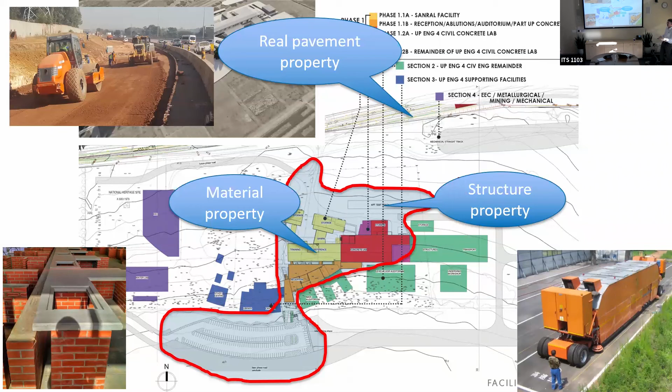So the benefit of all of that is that we've got this real, this is why I say it's like my grandchild. We've got this real state-of-the-art facility: that's reception, training lab, reference lab, concrete lab over there.

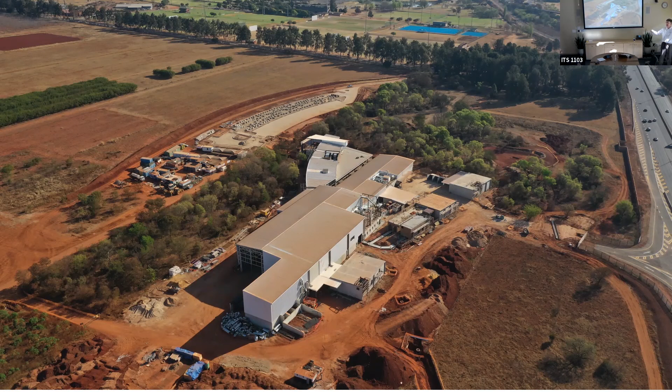And this is the real traffic section that we've got where you can put all of this research together. All of the stuff of testing a tomato over there to see how much damage. Then you come to the real road and see, but what's the riding quality on the real road and how that is affected in the bigger picture. And to put all of that together, to construct and maintain and manage a road for the benefit of the user. I think if that's the one thing that you remember from the talk, I would be quite happy.

You are not doing your job because stresses and strains are important. You are not doing it because your model parameters in a transportation model are important. Those things are only important if they support a better road. One of the old pavement professors, Andre Molenaar at TU Delft, one year at the conference, when we were young, a lot of people presenting a lot of good papers.

When we had all the discussion, he summarized and he said, listen, you have to remember, when I get home at night and I greet my wife and she says, how was your day? And I start to tell her it was such a good day. I've done these calculations and these measurements and stuff, and the stress is smaller than that one. She tells me, listen, stop. If what you've done today is not going to make the road safer and cut down on the congestion, then I'm not interested, because then you haven't worked.

And he was slightly annoyed by the answer initially, because he's doing really cool analysis and stuff. He said when he started to think about it, he realized, yeah, she's right. Because you're not an engineer or a transport planner because that's important. You are doing that job because people need to use that facility. People need to be able to drive from here to San Francisco without too much congestion.

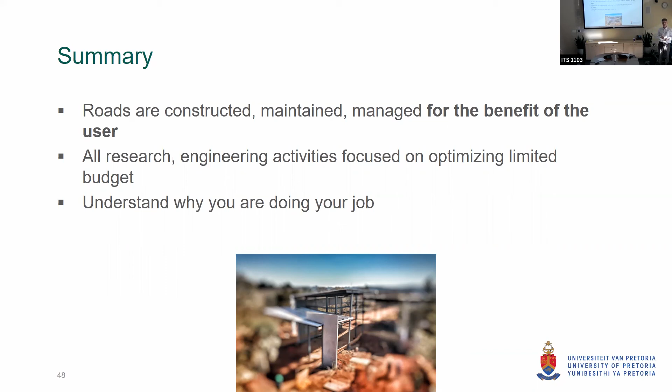Let's say it like that, because you will have limitations in terms of budget and availability, but you want to provide them with a safe drive, least congestion, no problem with possible accidents and so on. And your job is to, within an optimized, limited budget, do that job and provide that service to humanity. Then you are doing your job. Not when you get the detailed stress and strain and parameter analysis for this transportation model. So that's about it. Any questions?

Before there's a question, just a heads up. I don't think this is a secret that the university, actually ITS, which we're all associated with, is actually trying to see if we can set up a similar facility somewhere near Davis where we connect a real world facility with a closed circuit facility with the laboratories that go with it. The model for this is in Aachen, Germany. And there's another one in Virginia, the Smart Road, which they also close loop for the automated vehicles and how all of these different types of vehicles operate on these roads as well. Always fun. Any questions?

And this is maybe a little off topic, but in the analysis that included the harvesting and packaging of the tomatoes and avocados, were any changes made to the other parts of the processing as a result? They are actually currently looking at the packaging warehouse. There are aspects that they started to highlight and say, listen, the way that we dump the avocados over here, we can now see that's actually a bad way of doing it. We did not have the data before, so they are smoothing some of those processes. They are also looking at limiting the speeds on some of the roads where they cannot fix the road, because the moment you start to drop the speed, there's less of an effect on it.